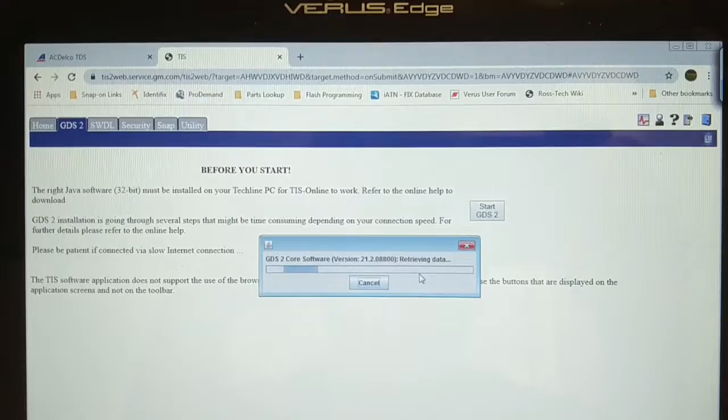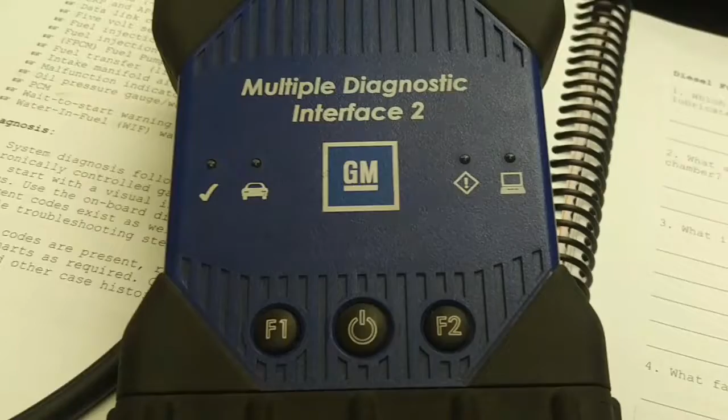So I decided to bite the bullet and pay for the subscription to GDS2 from General Motors, $757 Canadian a year, and I'm going to attempt to install it on my Verus Edge. I do run Ford IDS on my Verus Edge, and it seems to be a little on the slow side, but functional. So we're going to try GDS2 and see if that will work. I do have the Multiple Diagnostic Interface 2 from GM already, so that's the hardware required, and this is the software.

Well, that didn't work out well. The application was unable to install for some reason, and I know because I don't have the minimum hardware requirements, they're not likely going to give me tech support if I call them. I think I'll try and reinstall it again and see if that helps.

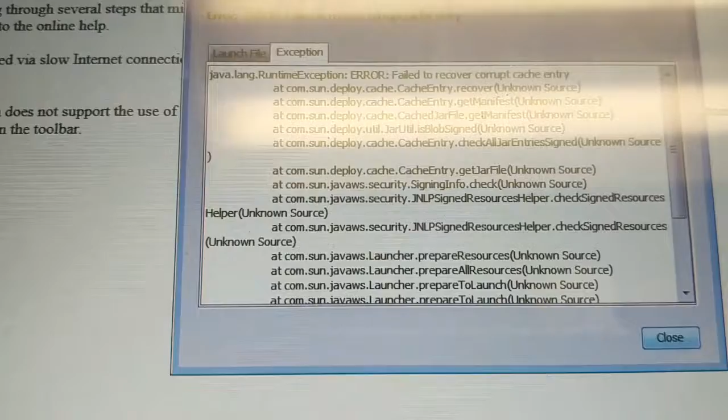Well, doing an installation a second time seems to have worked, so we're going to configure this thing and see what happens from here. So it's downloading the GDS2 version 21.2.08800. So far so good.

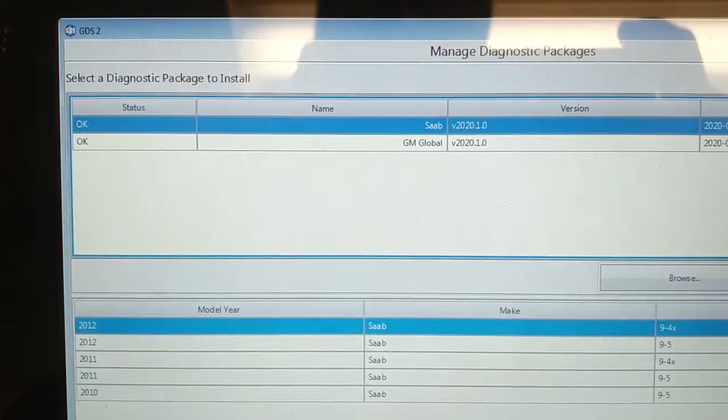So it's asking me to select a package to install. Well, I don't really think I need Saab, I don't think I've worked on one in the last 15 years. The chances of me seeing a Saab here is slim, so we're going to pick the GM Global. So it appears you have to pick what package you want to install.

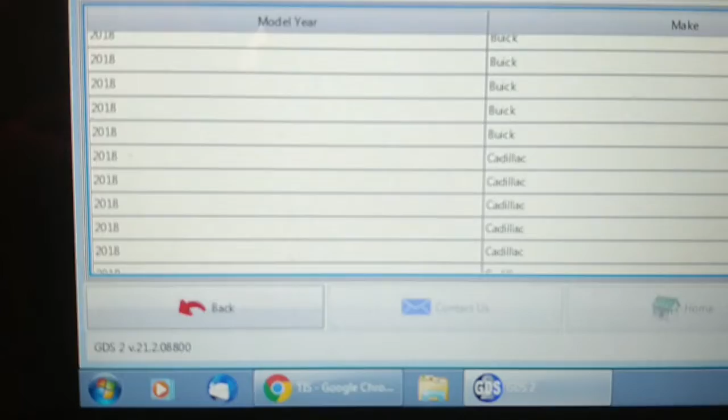Wow, I assumed it would be like Ford IDS where you'd have access to everything Ford, but this seems to be year specific and vehicle specific. So I'm going to install a 2017 GMC or whatever package that requires.

So the installation required a restart, so I am doing that. I see the Snap-on software still loads as it should. Note the GDS2 icon on the desktop, so we're going to close out the Snap-on software once it starts and fire up GDS2. Well, that's interesting, 29 days until lease expires.

I bought a year's subscription. I wonder why it says 29 days.

Well, we're going to go and try and run this on a 2017 truck. I see it says manage diagnostic packages, preferences, release notes, language, and so on.

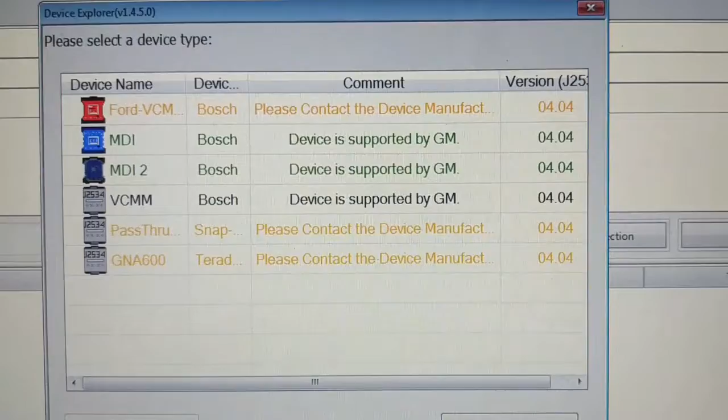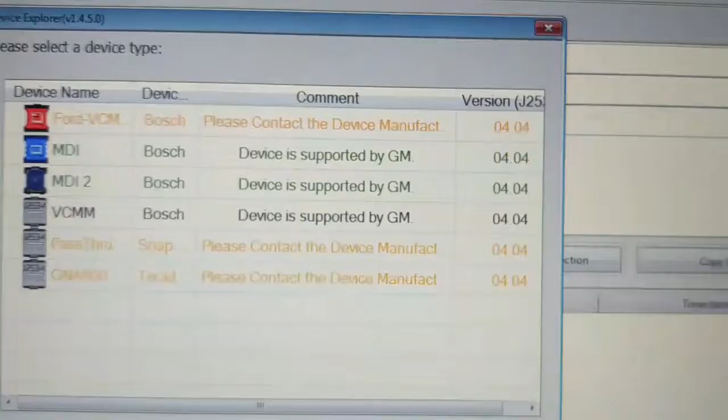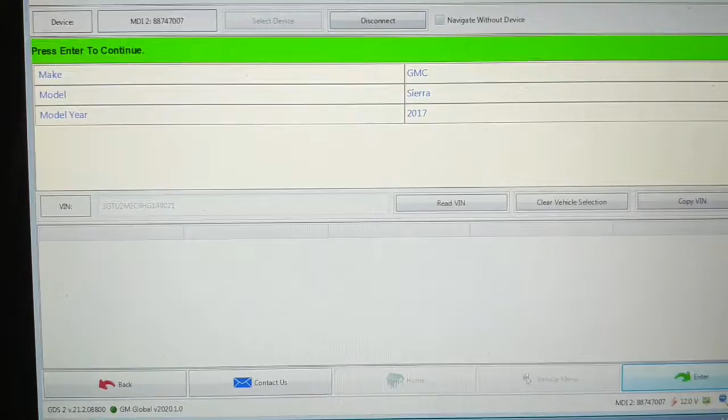Well, let's see how user-friendly this software is. Enter to continue. Taking your eyes off the road while using this could cause a crash. Yeah, no kidding.

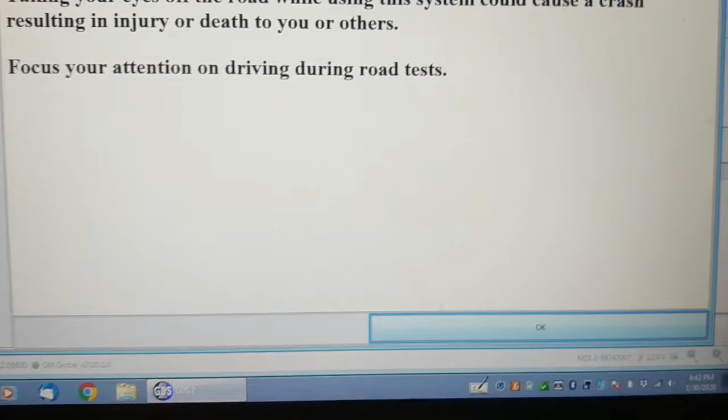You see that it read the VIN number from the vehicle on this 2017. It appears that you have to install each individual vehicle platform separately. Module diagnostics, vehicle diagnostics, system diagnostics, session manager.

Let's go to vehicle diagnostics. I don't know what I clicked on there because I actually touched the screen twice. Well, we'll see what comes up.

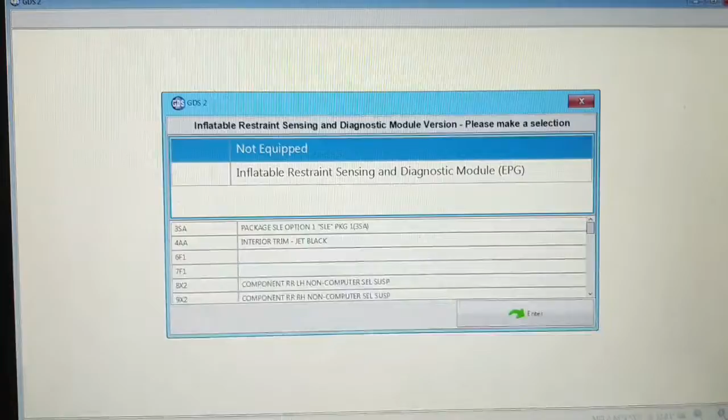It's funny how even when it knows the VIN number and it's a GM tool, it's asking me about RPO codes. Wow, it's not equipped with this module, this EPG. I wonder how many other RPO codes it's going to ask me about.

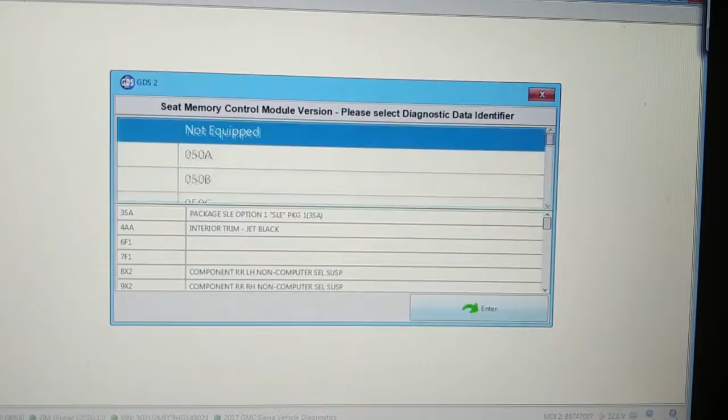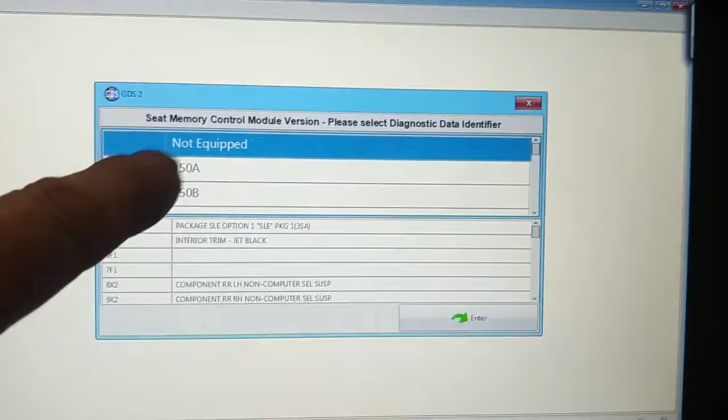Seat memory control module version. How am I supposed to know this? And there is a whole list of them. It's interesting that the Autel MaxiAP200 app asked me the exact same questions, and I had no clue, so I just picked the first one and hit enter.

You would think, given the fact that it knows the VIN number here, that it should be able to decode that from the build, but no wonder the aftermarket can't answer the right questions.

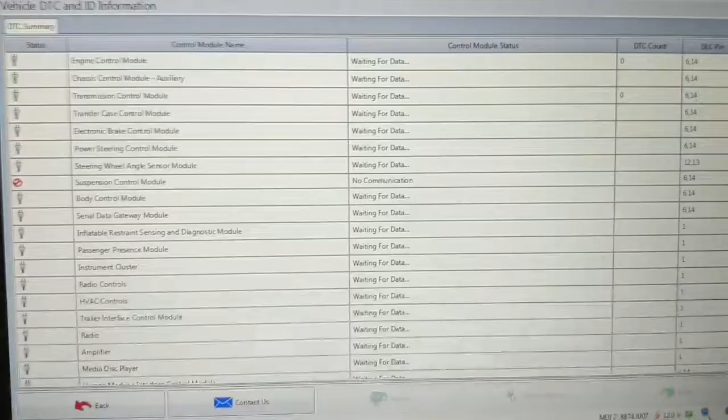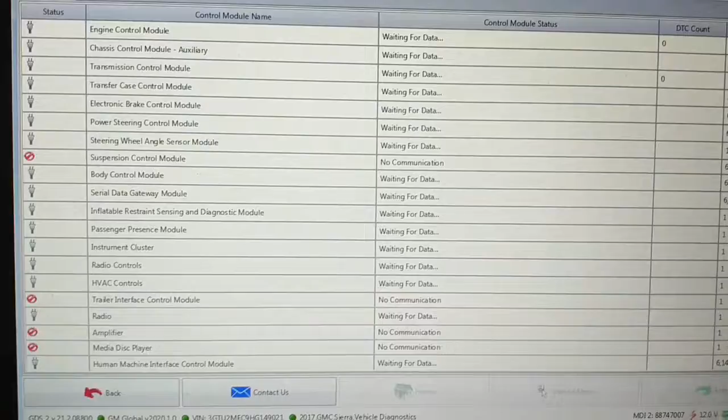Well, this looks like a network scan. That is cool. Yeah, that's a network scan. So over here on the left column you see the status.

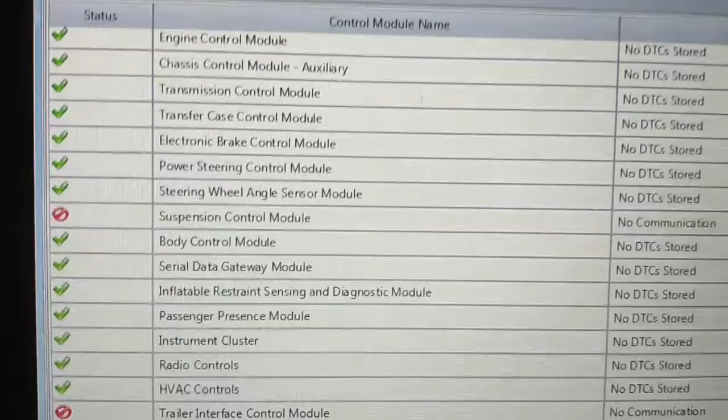No suspension control module. It shows trailer interface control module in red. And it's created a vehicle report.

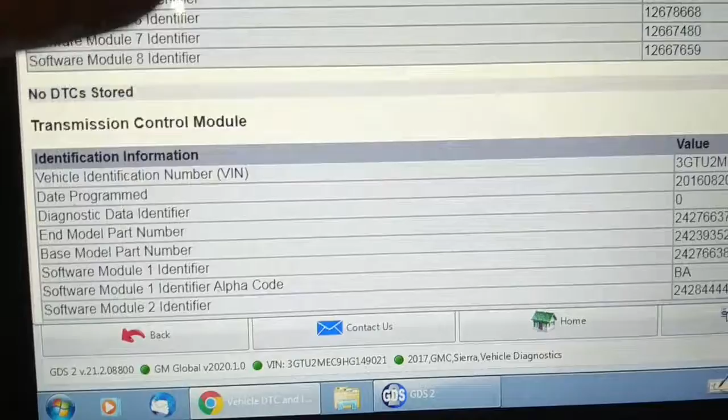This is nice. Wow, this is really nice. VIN number, chassis control module, part number, date programmed.

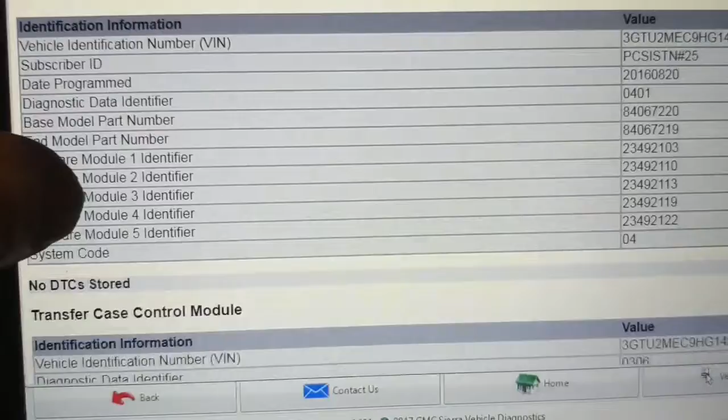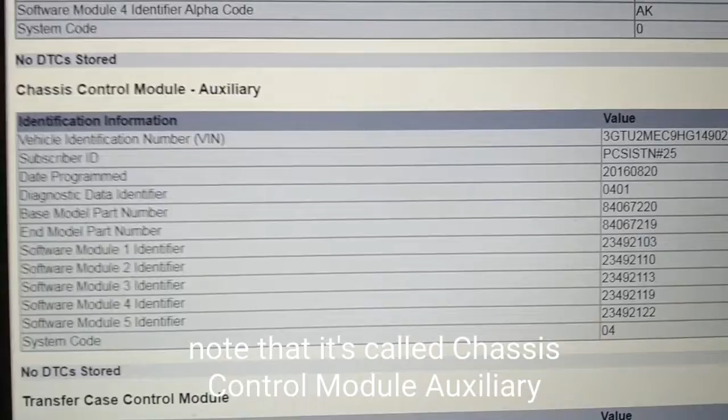So this is the vehicle I was trying to scan with the Snap-on scanner yesterday, and it wouldn't read data from the chassis control module. So it obviously exists, because there it is.

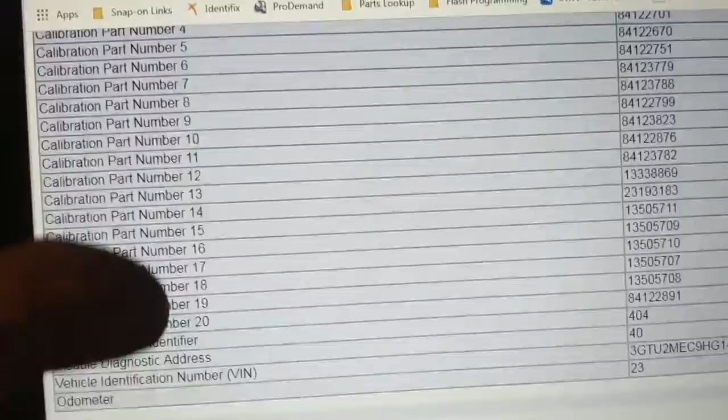Power steering control module, body control module, serial data gateway, human machine interface, telematics, steering wheel angle sensor, inflatable restraint, passenger presence, instrument cluster, and of course no DTC stored, HVAC.

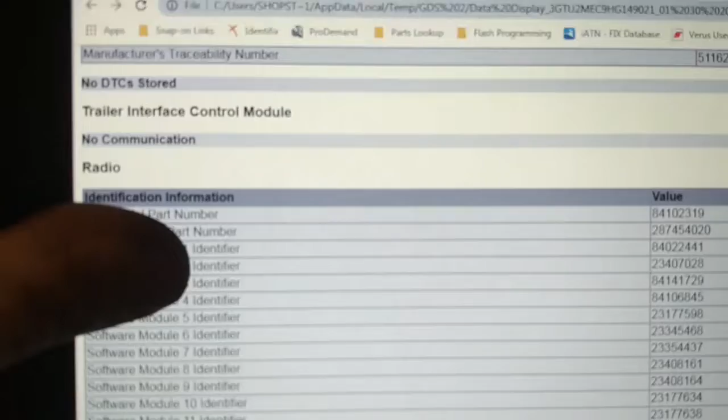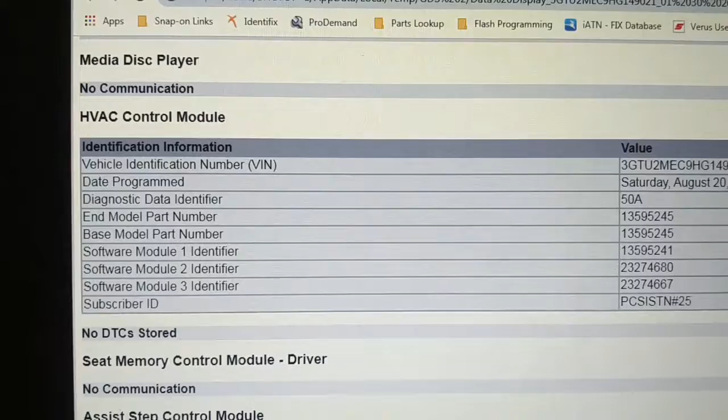Trailer interface control, no communication it says, so I don't think it has that. It uses a chassis control module. Vehicle identification number, assist step control. Wow, that looks like the end of the list. I'm going to pause this and browse around and see what else interesting I can find.

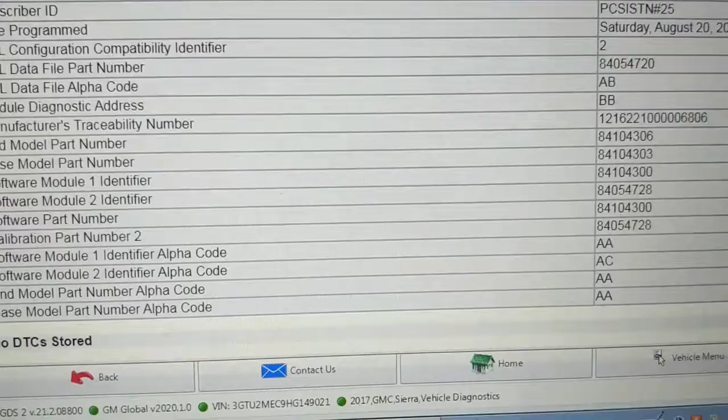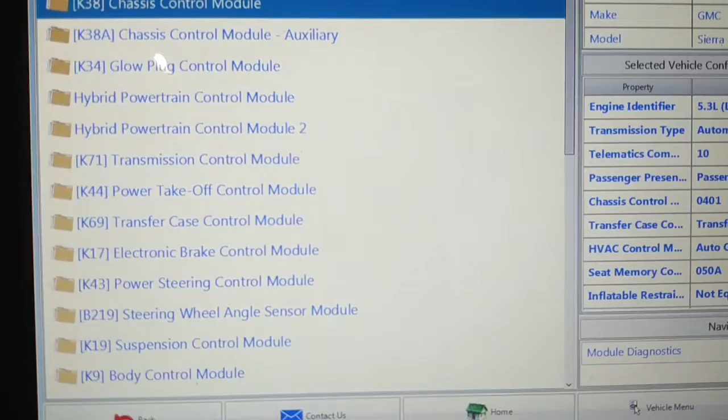I don't know what happened there, let's try that again. Module not detected - I thought it did read it. Well, that's interesting. A few minutes ago it read it, reported it, and now it says it doesn't exist.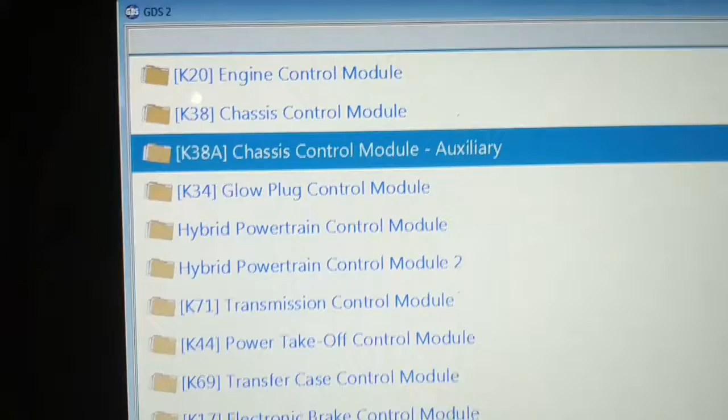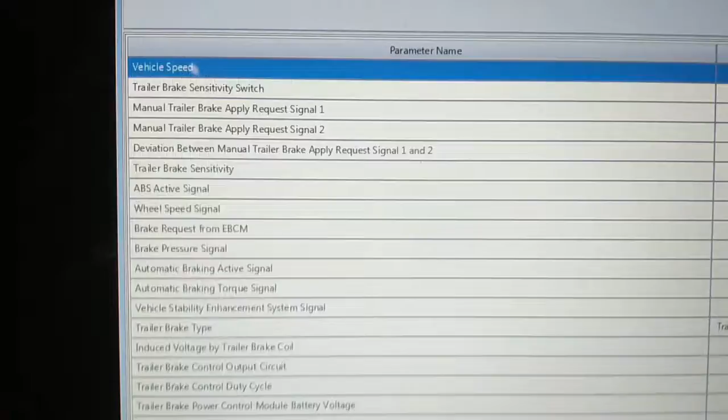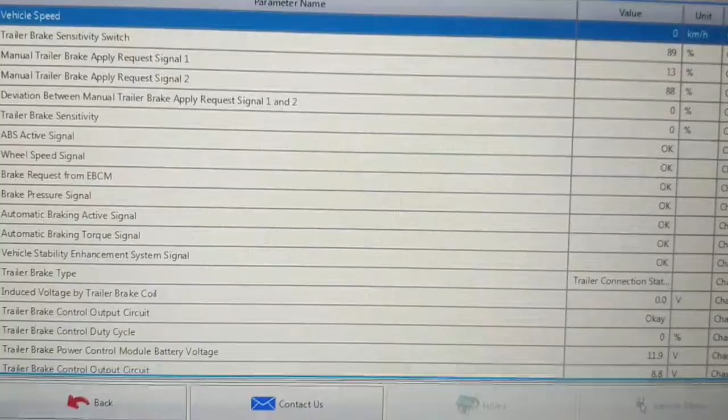Man, if the manufacturer can't get it right, how do you expect the aftermarket to get it right? Here I think I see what's going on. There's a K38 chassis control module and a K38A chassis control module auxiliary. If I click on that one, then it reads diagnostic trouble codes and data. So that could be why the Snap-on scanner is having difficulties, because it's trying to read the chassis control module, not the chassis control module A.

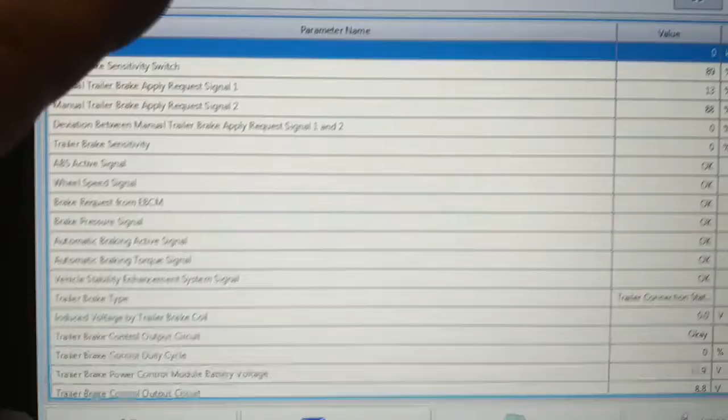Boy, I need to play with this a little bit. You see it's graphical data display, line graphs. DTC display is on a tab up here - no DTC stored. Back. What do we got? Control module functions: trailer brake control system, trailer brake duty cycle, trailer brake control signal. That's cool.

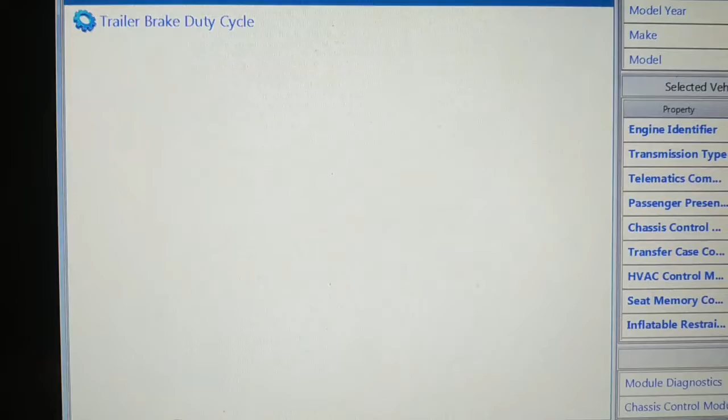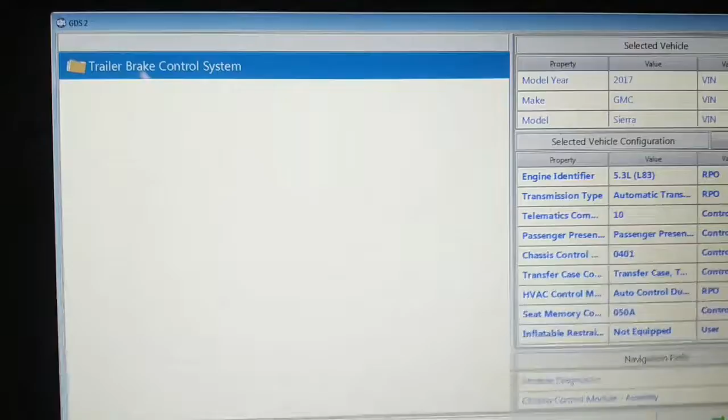Well, I definitely have to play around with this software, but it seems to run just fine on this Snap-on Verus Edge, even though the hardware doesn't meet GM's minimum standards. The only problem with that could be if I have to call tech support for some reason in the future - they can refuse to assist me because my hardware doesn't meet their standards. So we'll see what happens. I can always install this software on a laptop.

That's it for now, I'm going to play around and see if I find anything else interesting. So I tried to do this yesterday with the Snap-on scan tool and it wouldn't work - that was depressurize the fuel system. So I'm going to see if it works now and if it actually gives me data. Shift the transmission to park and block the drive wheels. Continue.

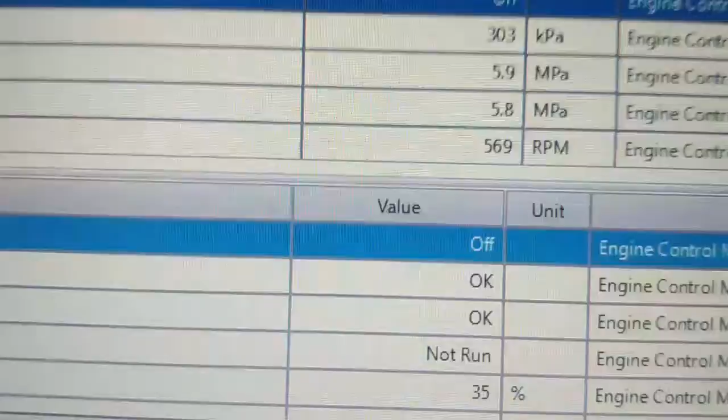Okay, so it shows live fuel pressure over here, and it is engine speed, fuel pressure sensor, 330, 340 kilopascals. Okay, what's the next step? Release control. Commanded state, uncommanded.

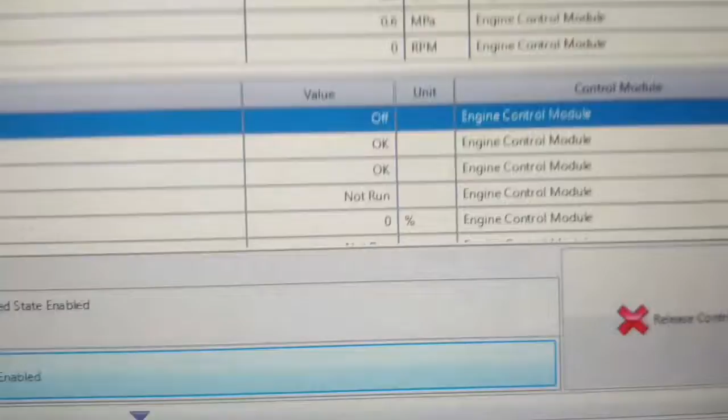So I'm going to command enable. And the engine just ran out of gas - and it quit. So that would not work with the snap-on scanner yesterday, and I suspect because of a lack of communication with the chassis control module, but I don't know. So then now it would be safe to remove the high pressure rail lines because there's 24 kilopascals, which is just over, well, just about 10 psi or something like that. I always have difficulty doing the math in my head. So that's kind of cool.

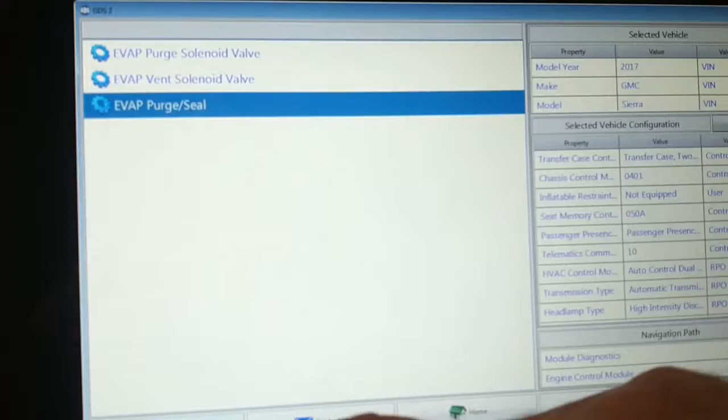Okay, so I'm going to try a purge and seal test. Enter. I noticed that if you highlight a data parameter such as this fuel tank pressure sensor and then click this little box here, it switches units of measurement. This is millimeters of mercury and inches of water now.

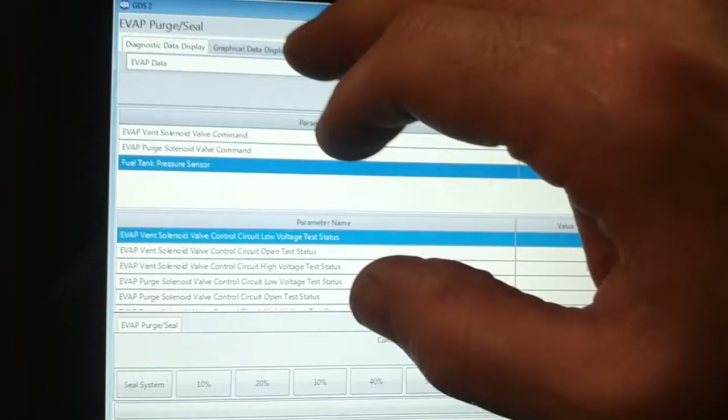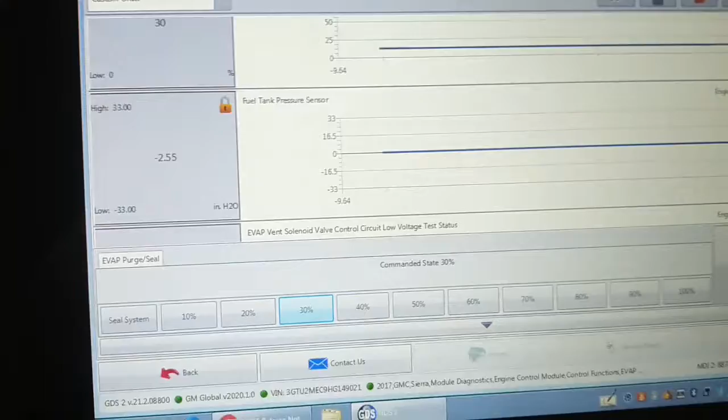I also noticed that you can look at this in a graph mode with 3 graphs, or you can look at it in a line graph mode. Let's look at it like this, and let's watch fuel tank pressure, which is at 0 right now. Command a 30% purge, and we should see - oh sorry, it's down here - should see the vacuum in the system. Where is it? It's going to abort the test any second because it's too high a vacuum in the system.

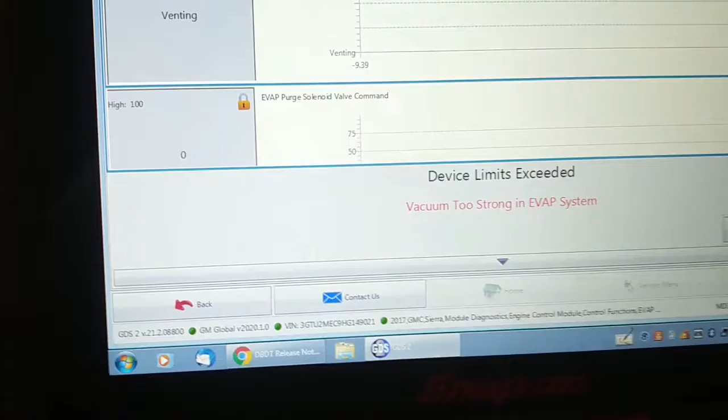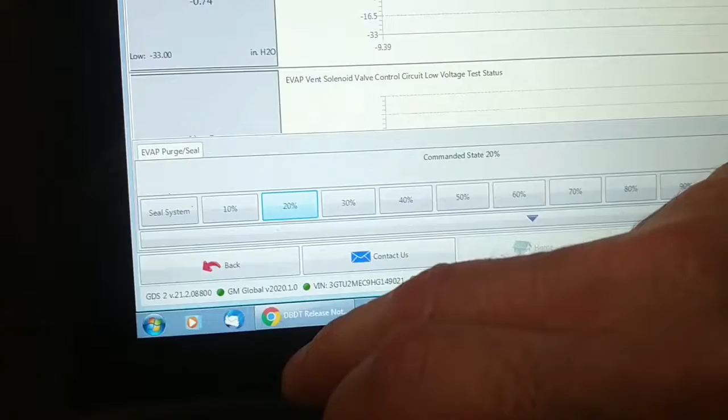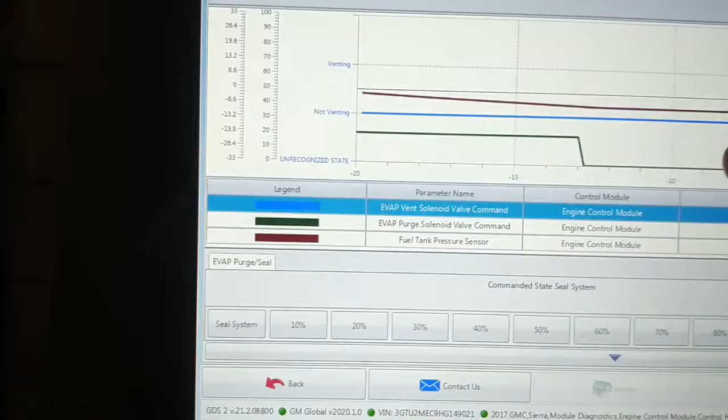Okay, let's try this again. Let's bring up the graph here: venting, purge solenoid, fuel tank pressure, inches of water. So this is the one we want to watch. Let's click 20%. It appears that it's not running - well, I see it here, but I don't see the graph. And then system seal, but I don't see it graphing. It's holding pressure or vacuum in the tank. How about line graph? Yeah, the red trace here is the fuel tank pressure, and it's holding now.

Well, I'm going to have to definitely play with this software. There's a big learning curve here because it's completely different from using an independent manufacturer scan tool.